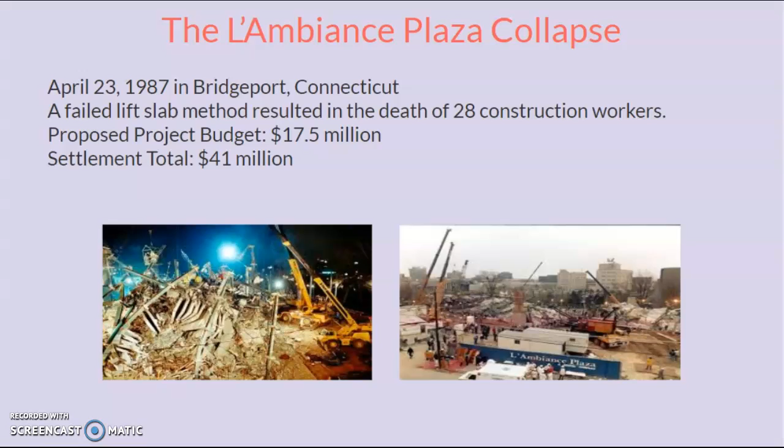The concrete slabs were placed by hydraulic machines using the lift slab method. These slabs were then held in place by steel wedges temporarily until they were positioned correctly. Once correctly positioned, they were permanently attached to the steel columns.

There were 2 shear walls located in each of the 2 towers that made up the building, with each one supposed to be providing lateral resistance for the entire building except for the top 2 floors. Rigid joints between the steel columns and the concrete slabs were used for the top 2 floors.

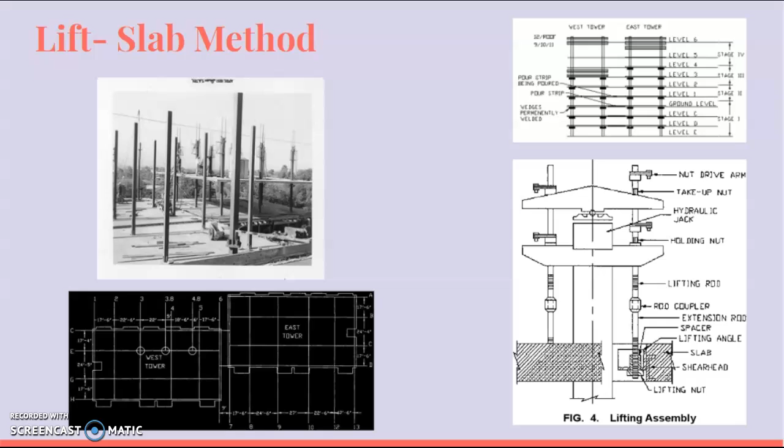And shortly after, workers were tack welding the temporary wedges under the 9th, 10th, and 11th floor slabs. They heard loud metallic sounds followed by rumbling. The slabs then began falling on top of each other, with the weight becoming too much for the slabs and beams to halt. The entire half-finished building collapsed in just 5 seconds.

And now it's important to mention that due to an abnormally swift settlement agreement, the investigation of the collapse ended before an official determination of the cause could be concluded. But there are very well thought of and reputable theories that I will discuss in a bit.

And according to a New York Times article written back in 1987, OSHA found that there was a pattern of sloppy construction practices throughout the project and an overall sense of employer complacency for essential workplace safety considerations. Due to this, there were several players who were fined by OSHA. In total, the labor department imposed a $5.11 million fine, which was a record at that time. No charges were ever brought upon any of the players in this project disaster.

The biggest player here, and the one that seems to have the most blame besides the primary contractor, was Texstar Construction. They were the subcontractor hired to lift and oversee all of the concrete slabs. Something to note, there was a previous incident that occurred before the collapse. Investigators discovered that prior to this incident, Texstar had similar problems when it comes to slab lifting.

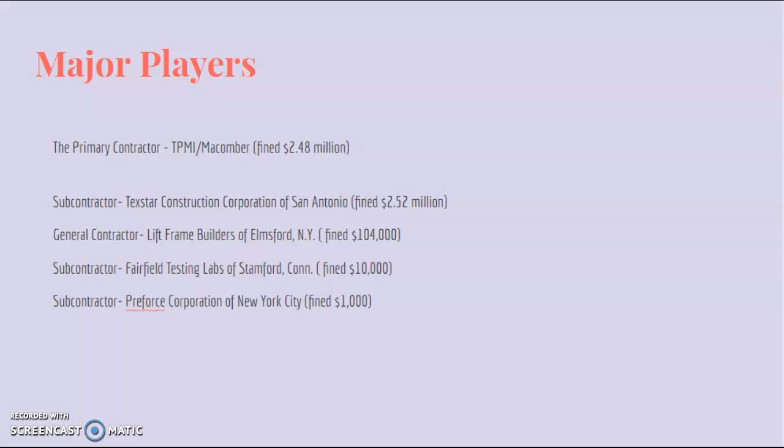And according to the contract documents, the contractor was responsible for a large amount of the structural design, including the structural frame involved in the lifting process, which left a lot of structural engineering and concept design dispersed amongst different subcontractors and even sub-subcontractors. What really happened was subcontractor A, a subcontractor to the GC, was responsible for design and construction of the structural frame that was used in the lifting process.

However, subcontractor A subcontracted the design and prep of the tendon drawings for the post-tensioning system to subcontractor B. The shop drawings were also prepared by subcontractor B, and those were also the only drawings that showed the arrangement and the number of post-tensioning tendons. Both the calculations and the shop drawings were supposed to be reviewed and then approved by a professional registered engineer who would then mark it with an approved seal.

The seal instead stated, quote, "Checking is only for general conformance with the design concept of the project and general compliance with the information given in the contract documents. Only the contract drawings will be reviewed by an engineer and sealed with hand stamp." Subcontractor A also subcontracted preparation of the shop drawings.

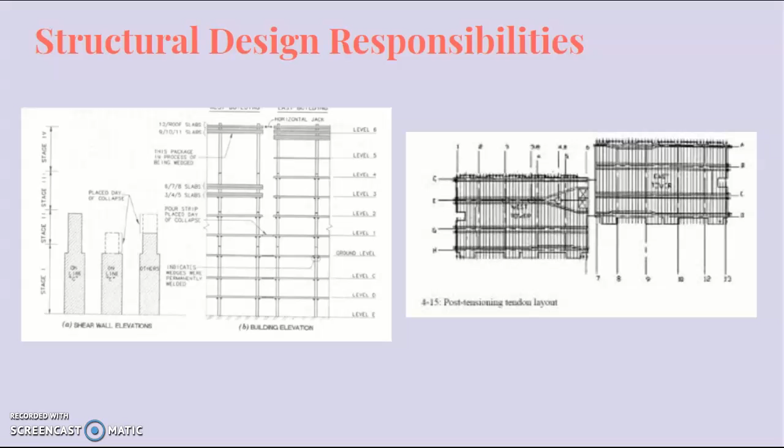So now, due to unusually quick settlement agreements, like I mentioned before, the investigation was halted, and because of that there was never a defined answer as to what caused the collapse. There were many things that could have caused the collapse, but there are 5 competing theories as to what could have caused the collapse.

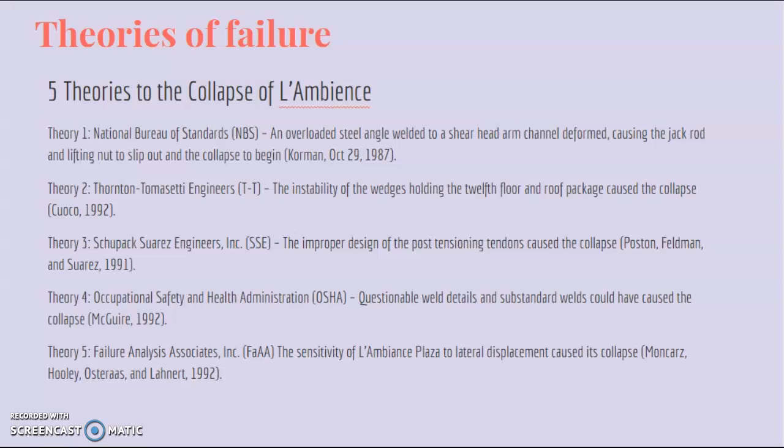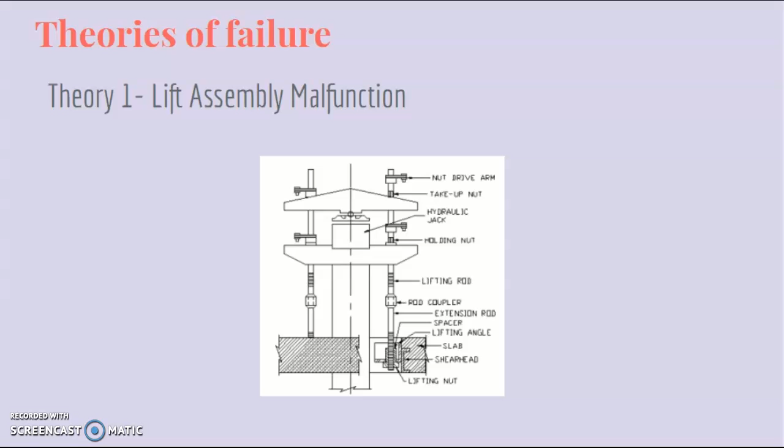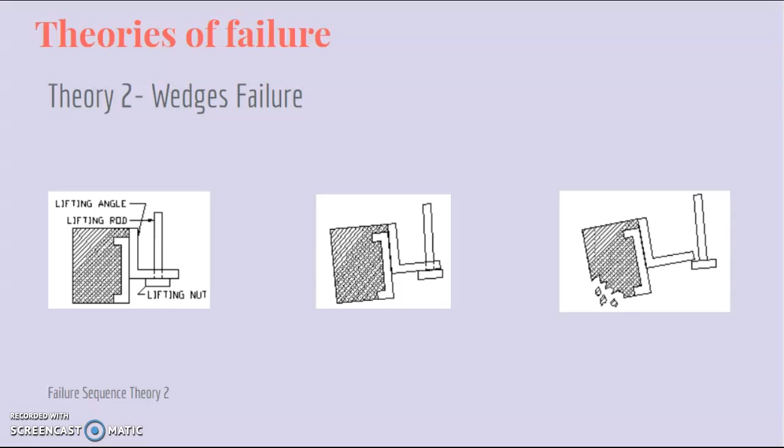Theory 1 states that an overloaded steel angle welded to a shear head arm channel deformed, causing the jack rod and lifting nut to slip out, and the collapse began. Theory 2, according to Thornton Tomasetti, the engineer, states that the instability of the wedges holding the 12th floor and roof package caused the collapse.

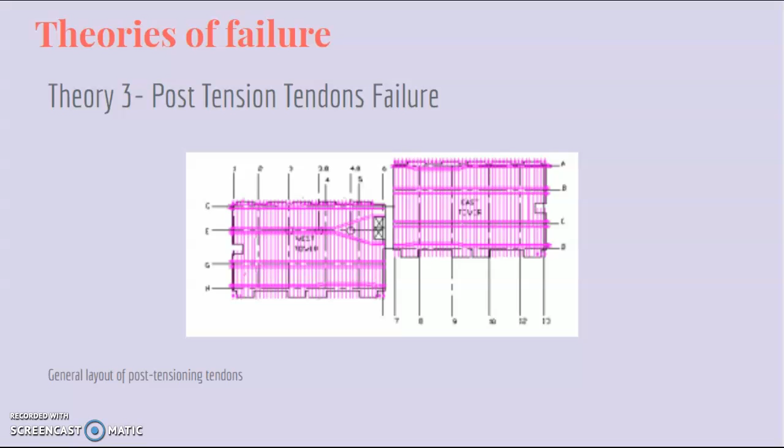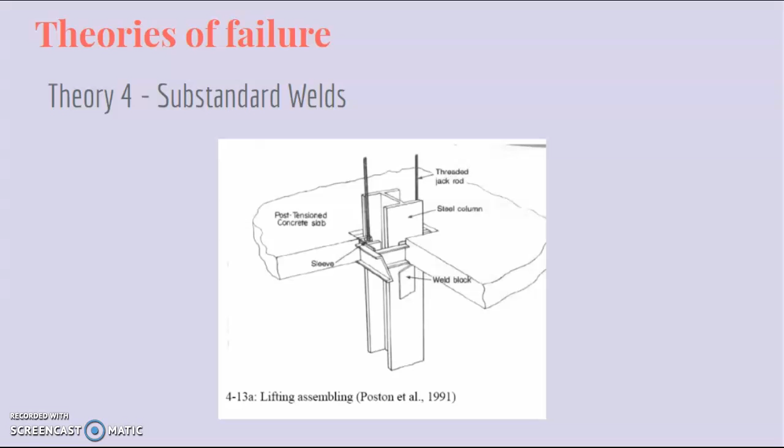Theory 3, according to Schupack Suarez engineers, the improper design of the post-tensioning tendons caused the collapse. Theory 4, according to OSHA, it was the questionable weld detail and substandard weld that could have caused the collapse. And the final theory, according to Failure Analysis Associates, is that the sensitivity of L'Ambiance Plaza to lateral displacement caused its collapse.

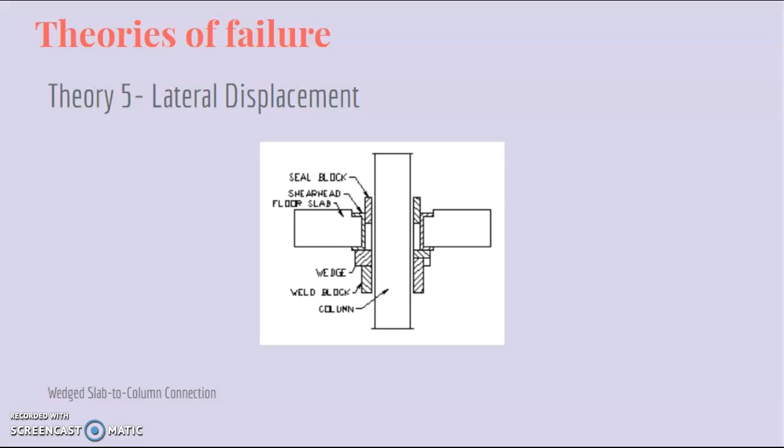And the final thoughts: although no criminal charges were ever filed in the L'Ambiance disaster, mediation resulted in a $41 million settlement for the families of the victims. In 1994, the government released a new safety regulation pertaining to the lift slab method of construction because of this disaster. To this day, the exact cause of the disaster remains a mystery, but from the research I've done, numerous oversights from various subcontractors and the lack of detail from the contractor resulted in this terrible disaster that hopefully is never repeated.